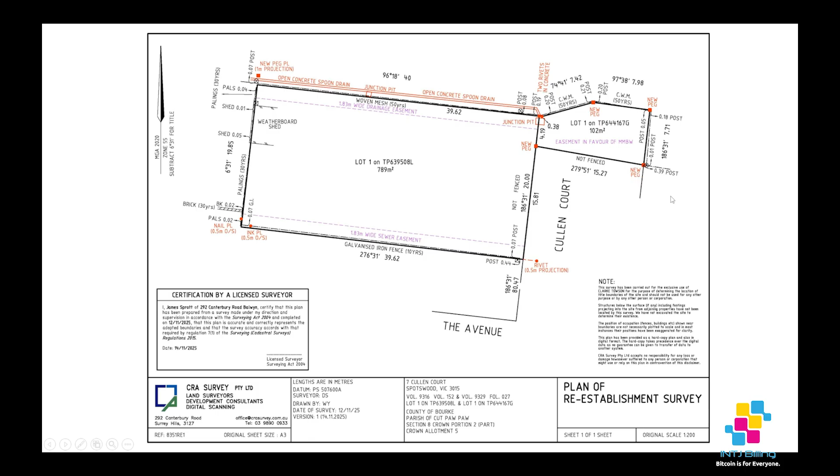All right, we've got the pit here, and this is a really important drainage asset. It's a former municipal grade drainage asset. It's got a 330 millimetre pipe that drains underground through to what's known as Schutts Estate. Schutts Estate is a drainage system here in Spotswood, a very important one. So here's our survey, right?

This is the legal point of discharge. I engaged Hobsons Bay City Council and spoke to an engineer there, who provided me with the legal point of discharge. You see this arrow pointing down here - the legal point of discharge is right here, just where the top of this line is, and it's outside the garage. It flows down into the municipal drainage system and then onto Schutts Estate. You can see it goes to the right.

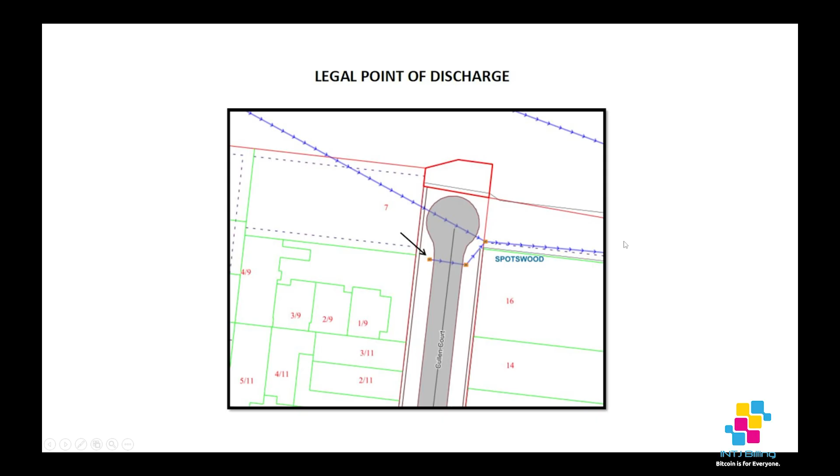This is a very important image, a composite image I created using the fantastic survey by CRA Survey - this is CRA Survey's cadastral survey. I've overlaid that with the Hobsons Bay legal point of discharge, which you can see here. I've also overlaid it with this purple line, which is from a flood certificate Melbourne Water supplied to me recently.

Highlighted in yellow, this is the drainage pit on the front block. This is the legal point of discharge, and you can see the concrete spoon drain up here. Water flows down over the road reserve, and any overland flow flows directly into the concrete spoon drain and then into this pit here, and then onto Schutts Estate. So where the legal point of discharge is, just outside the garage, any rainfall that makes its way there is then safely carried away to Schutts Estate main drain.

Okay, here we have Cullen Court. As you can see, it's a bowl. This is really important for what I'm about to discuss.

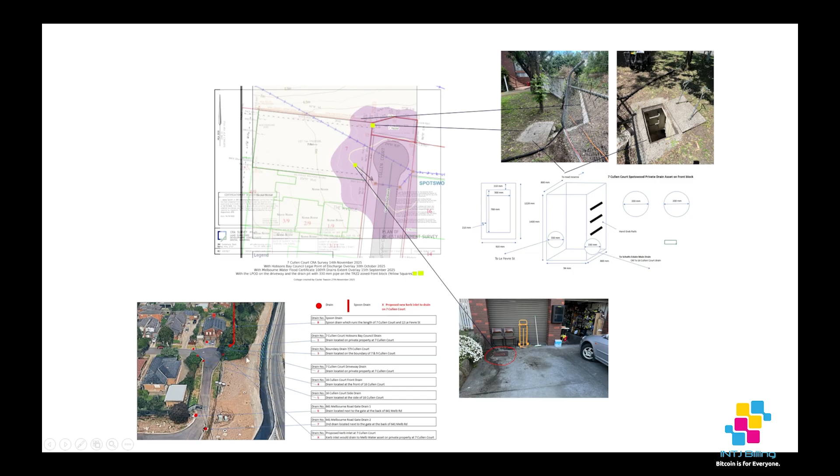Now down here we've got a Google Earth view, and what I've done with this view is I've placed red dots where each of the municipal drainage assets are, as well as the legal point of discharge and the drain on the TRZ2 zone block, as well as the spoon drain.

All right, this is an important image. This is proof that all flood behaviour occurs outside the title boundary of 7 Cullen Court, and that the SBO over 7 Cullen Court is not hydrologically valid. Cullen Court is a hydrological - or it's an optical illusion, right?

So here's our CRA survey of 7 Cullen Court, and the image you see is a Google Earth top-down image. I've used the opacity factor so that you can see both the survey as well as the Google Earth view. Now, very importantly, what you can see for the first time, and what the authorities couldn't see before - this is my insight - is that the survey legally shows here's the boundary to the property, here's the boundary to the TRZ2 zoned front block. And this green strip here is Council Nature Strip.

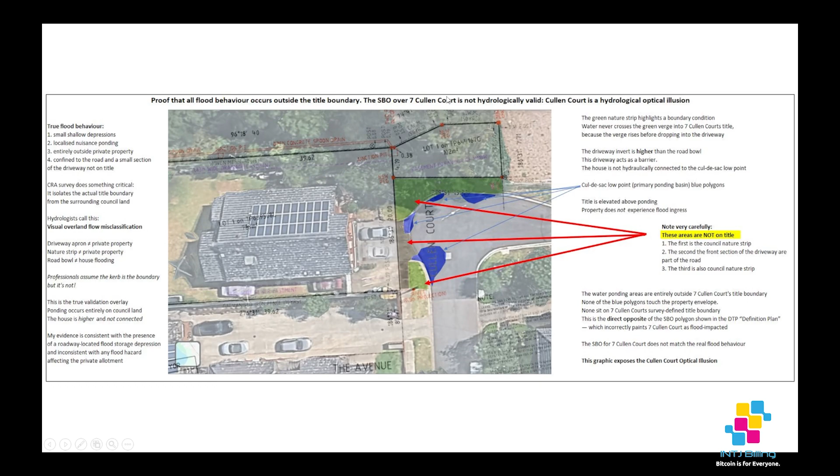This is some work I did yesterday at the front of the property. As you can see here, this is the driveway lip - a 30 millimeter high driveway lip. Some areas are a little bit higher than 30 millimeters, some are a little bit lower. I measured it yesterday.

This lip acts as a defined hydraulic control, or defined hydraulic control crest. It separates the property from the roadway. So for overland flow to reach the dwelling, i.e. to reach 7 Cullen Court...

What would actually have to happen is that cul-de-sac waters, i.e. water hitting the road, would first need to exceed the driveway crest elevation by over 30 mil. Here's our measurement of the driveway lip. The waters would have to overcome that lip, and then overcome the driveway's measured fall towards the road.

Right, that's very important because the fall of the driveway, we've got a 1 degree fall towards the road. And it would need to do that despite upstream capture provided by the road reserve spoon drain, which is in the Department of Transport's road zone, and the 330 millimeter easement pipe, as well as the legal point of discharge here.

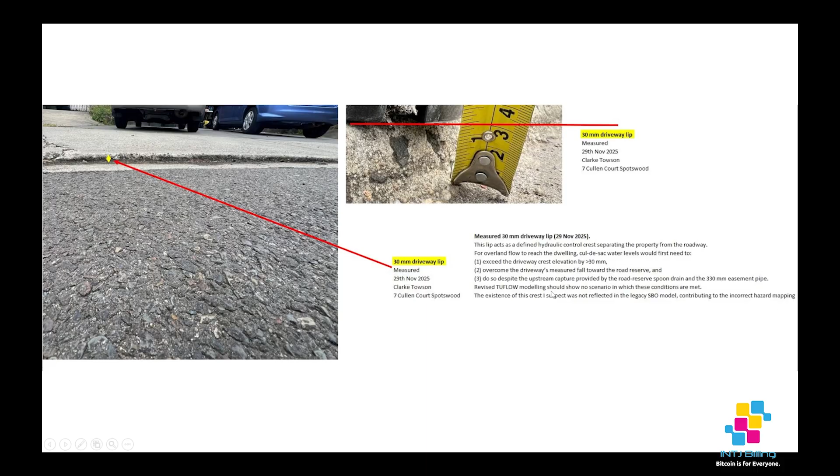So Melbourne Water, when they do a revised TUFLOW model, should show no scenario in which these conditions are met. My suspicion is that the existence of the driveway crest was not reflected in the legacy SBO model, which contributed to the incorrect hazard mapping of 7 Cullen Court.

Modelled flooding versus physical reality. Why inundation at 7 Cullen Court is impossible. So what you see up here on the left, this is a flood map from a company called Engeny.

This flood map was created for 50 The Avenue, which is this property here. I got wind of these maps when I checked out Hobsons Bay Council's Green Light portal when I was looking at development applications for my neighbour.

Now, firstly, I'd like to state just before we begin analysing this map that I don't have any connection with Engeny. I'm not a client of Engeny. Engeny is aware of some of my work, but I don't want this to read as a criticism of Engeny. I don't want people to look at it and say, oh, look, Engeny is wrong, this is terrible. No. I really need to say this from the beginning, that this is not an attack on Engeny, it's not a criticism of Engeny. I think they were working with modelling provided to them by Melbourne Water when they did their TUFLOW run.

So, having said that, let's begin with this. Engeny's model shows a flood depth extending up the driveway incline at 7 Cullen Court, this section here. And that's contrary to measured ground slope. Remember, the real slope measured is between 0.8 to 1 degree downward to the road.

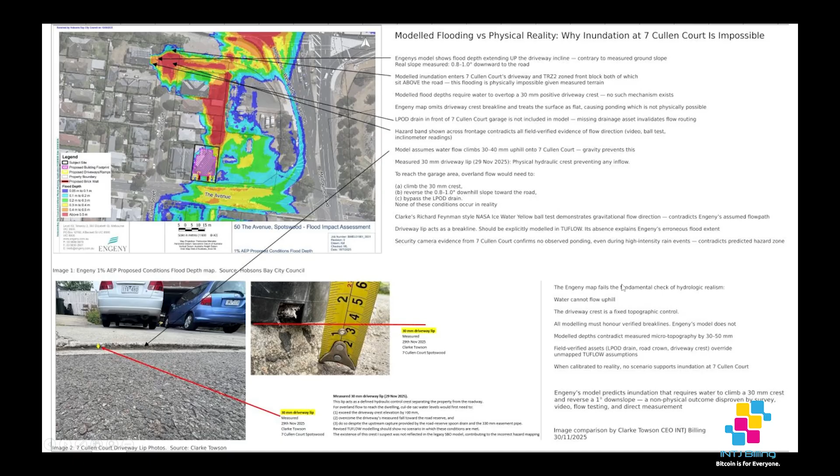So, important graphic. This is a very important graphic as well. I call this a composite terrain validation overlay.

On the left here is the CRA survey with the Melbourne Water underground drains extent, overlaid with the legal point of discharge, and then overlaid over Engeny's map.

So let's go through this image. This is a composite overlay, and it demonstrates a critical mismatch between Engeny's modelled 1% AEP flood extents, so 1 in 100 year storms, and the verified terrain - what the land looks like, its characteristics.

So it's a mismatch between that as well as the drainage assets and the survey data I gathered at 7 Cullen Court - the CRA survey, survey elevations, legal point of discharge location, the 330 millimetre drainage pipe, and the TRZ2 zone block.

So the topography all confirms that the areas depicted as inundated in the Engeny depth map are in fact local high points draining towards the road bowl in 7 Cullen Court. We've got the TRZ2 zone block up here, which is a high point, and the front of 7 Cullen Court, which is an assumed low point, but it's actually not - the actual low point is the Cullen Court bowl.

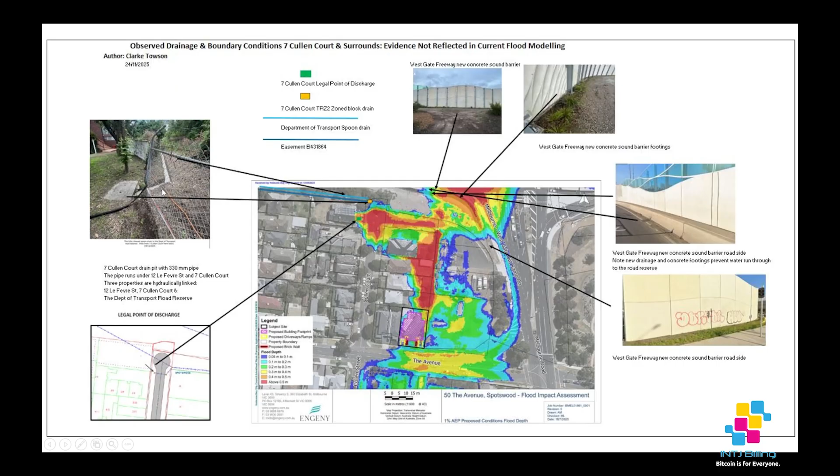The other important thing to notice is we've actually got three properties that are hydraulically linked: 7 Cullen Court, 12 Le Fevre Street behind it, and the Department of Transport's road reserve. The hydraulic linkage happens because we've got the easement pipe which runs under both properties, and we've got the spoon drain. Very important to note this.

All right, let's go through some TUFLOW boundary conditions. This is my TUFLOW model update input register - hydrological evidence and geometry corrections for 7 Cullen Court's SBO. This is for review by Melbourne Water, and I've passed on all my research to Melbourne Water as well as to Hobsons Bay Council engineers.

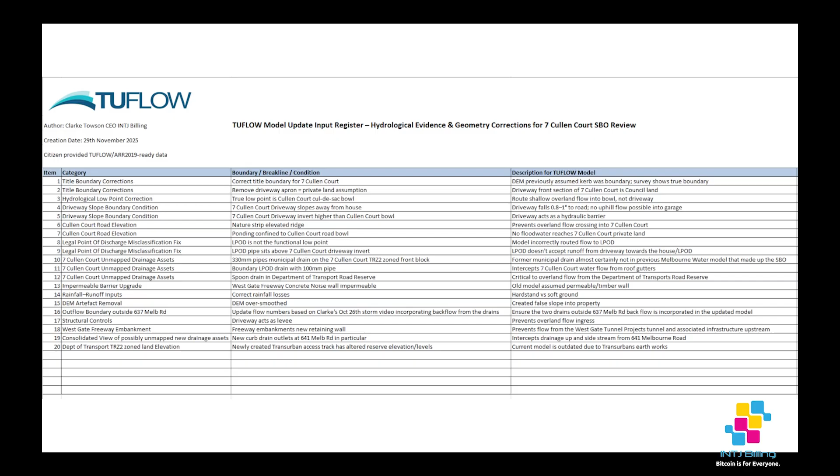I counted 20 boundary conditions that were not taken into account with the original flood models. I'm not going to go through this whole list now - you can pause the screen and look through this. Suffice to say, these are very, very serious issues. For the new model that Melbourne Water creates, these boundary conditions will have to be included, otherwise the model will be incorrect.

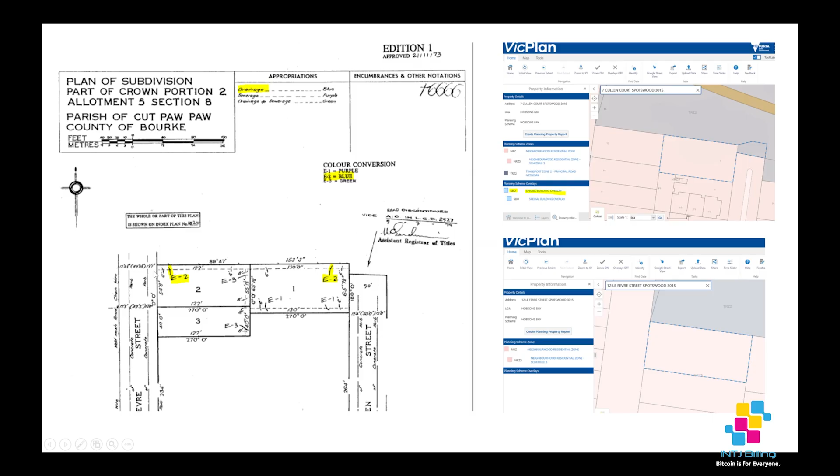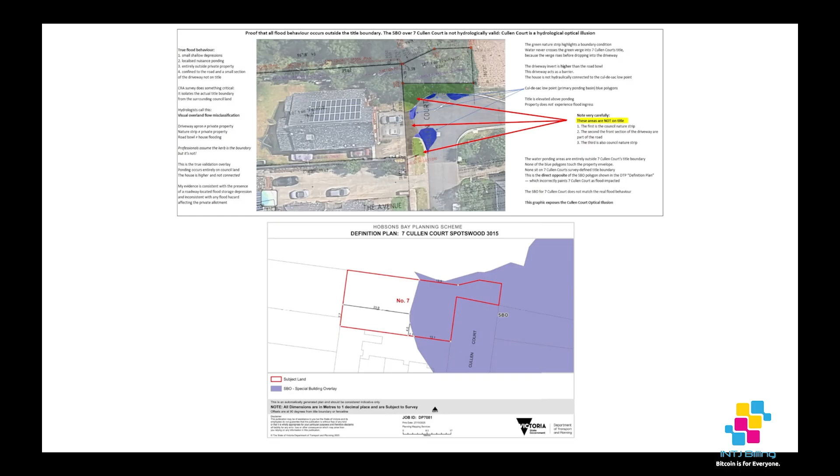I've got a lot more research that I haven't discussed in this presentation - there's a whole lot more that I can show, and maybe I will do that in the future. I know this video is different to my usual Bitcoin videos, and I apologize to anyone who came to this video expecting more Bitcoin videos. But this is something I've been working on for 6 months - it came up after I was doing some gardening on the front block and I noticed the zoning discrepancies.

I hope you've enjoyed this video. I've done my best - it's been a whole lot of work over 6 months to put this together. This presentation is the culmination of all my research. I think it should be obvious that Schutts Estate needs to be remodelled. Melbourne Water needs to come up with that new flood model, as well as any firms they engage, like Engeny or other flood modelling firms, to come up with more accurate flood maps for the Schutts Estate catchment, which obviously includes 7 Cullen Court, as well as my neighbours, some of whom are developers - one's a large developer, one's a smaller boutique developer. So getting the SBO right is extremely important for Spotswood, and extremely important in general.